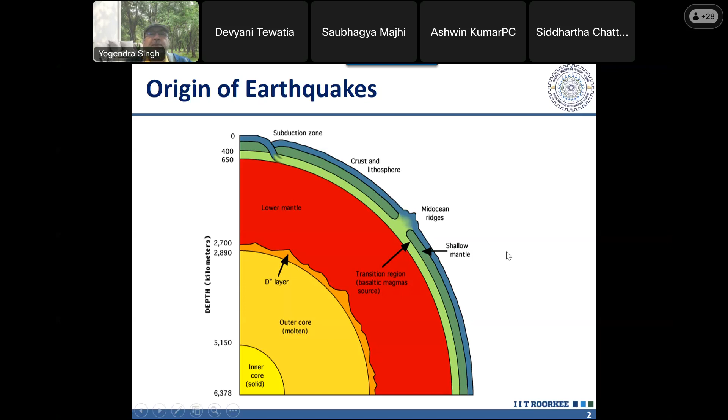Below this solid crust of the earth there is hot molten material. The temperature towards the core of the earth increases, and because of that there are convection currents. Those convection currents apply forces on the earth's crust in different directions, and due to that this earth crust is broken into different parts, and those parts are moving with respect to each other. You may ask what is the proof for that - the proof is in terms of the continental drift theory. Scientists have observed that all the landmass of earth which we see today can fit into one single landmass. The hypothesis is that once upon a time, some 225 million years ago, the whole landmass was together, but because of these convection currents inside the earth's structure, that landmass got broken into different plates, and those plates started moving with respect to each other.

And you can locate India somewhere here in this. Let me change this to pointer.

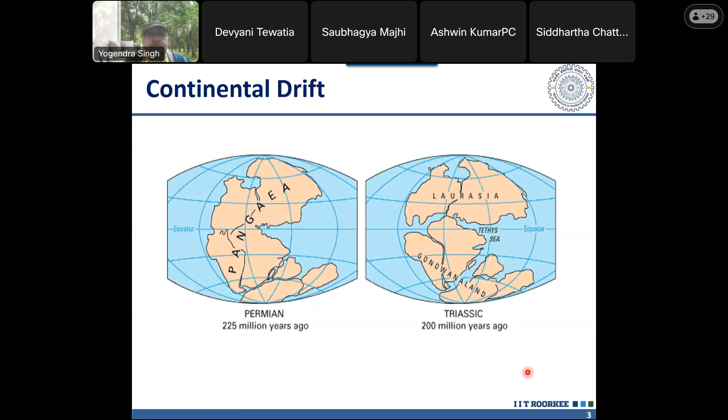So you can see that India is somewhere here, and with time it started moving. Some 135 million years ago we were somewhere here, and then we moved further. This landmass, this plate, later developed into the Indo-Australian plate, which was moving towards the Eurasian plate, and finally this is the situation we currently have.

We can see that the lower part of India, below the Himalayas, has come from another plate, whereas the top part, coming from the Chinese side, has come from the Eurasian plate. So currently India and Australia are on the same plate, and that plate is moving towards the Eurasian plate, the Chinese side, and we are losing around 2 inches per year of land.

So what is happening is this Indo-Australian plate, moving towards the Eurasian plate, is going below the Eurasian plate, and slowly it is getting consumed, it gets molten, and there is a lot of force developing at the interface. As a result of that force, the height of the Himalayas is increasing. You may be aware that the height of Everest is actually increasing by a small amount every year. As a result, we are also losing our land by a small amount of 2 inches per year.

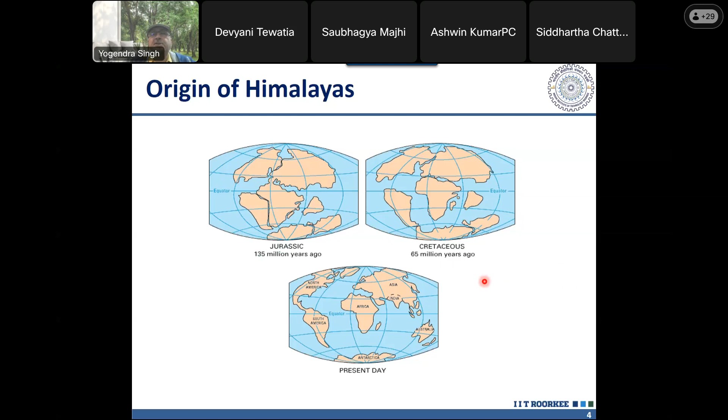That energy, time and again, gets relieved in the form of different earthquakes. So this area is seismically very active, but it's not that earthquakes are occurring only along this boundary.

If we look at the different tectonic plates currently existing on the Earth's surface, these boundaries have been identified as shown here, and different types of motions are occurring at different boundaries. Here you see this triangle notation at the boundaries, showing convergent boundaries. At this location, the plates are moving towards each other.

So what we see here in the Himalayas and the northern side of India, here also we see convergent boundaries. Then at other locations, the plates are moving away from each other, so there are divergent boundaries. These divergent boundaries fortunately are generally occurring below the sea.

So new earth, new crust is getting created. There are mid-oceanic ridges which have been found under the deep oceans, which is proof that, through measurement of the magnetic orientations there, it has been found that those ridges have been created at different instants of time. That shows how the earth crusts, or these plates at these locations, have moved away from each other. Then there's another type of activity shown here.

This plate, the Indo-Australian plate, which was one plate, is actually trying to break into two. What you see here, this red hatched portion, is being subjected to very large stresses. In this region, close to Indonesia and Sumatra, a lot of energy at the moment is getting dissipated, and we have seen that large earthquakes in the recent past have also occurred here.

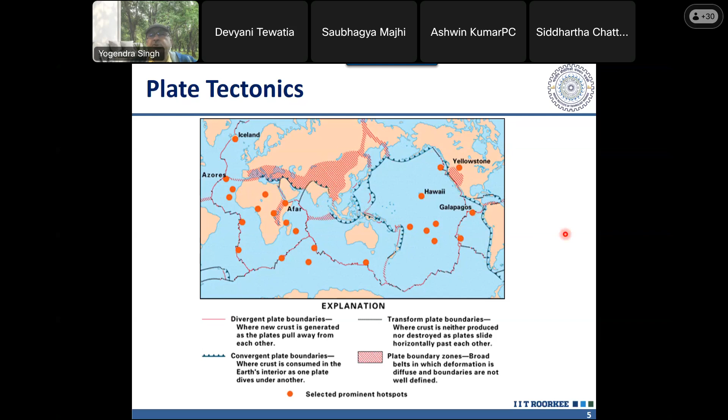These are called interplate earthquakes, occurring at the boundary of different tectonic plates. Earthquakes are not limited to the boundaries; they also occur within them. Within this Indo-Australian plate also, earthquakes are occurring. These are called intraplate earthquakes, but generally the intensity of intraplate earthquakes is less compared to interplate earthquakes.

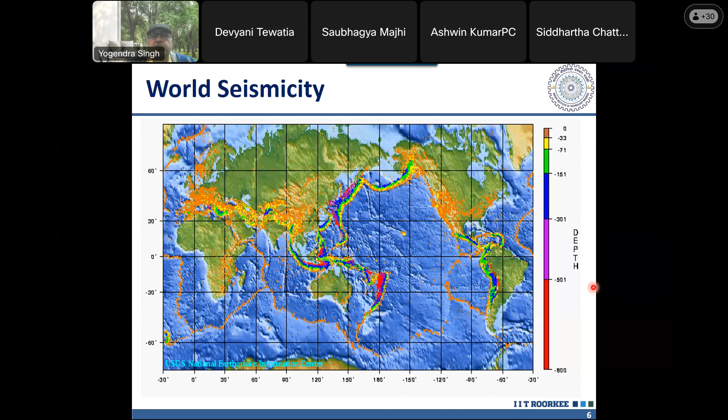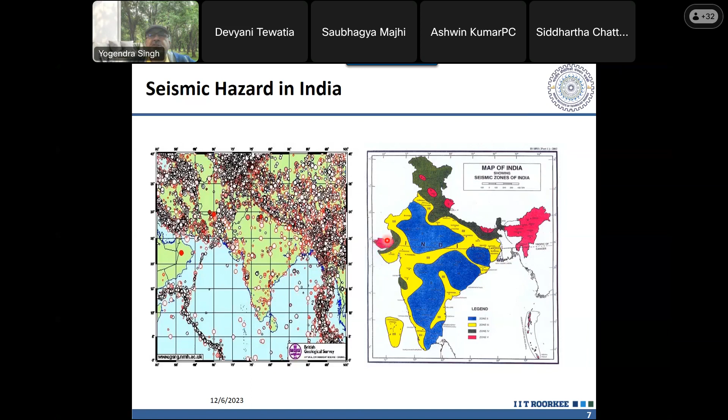If we see the closeup of India, most of the earthquakes are occurring in the northern part, but near the Gujarat Kutch area also a lot of earthquakes are occurring. These regions from the beginning have been in the highest seismic zone, which we currently denote as seismic zone 5. If you look at the current seismic zonation map of India, zone 5 is near Gujarat Kutch area and in the Himalayan region. We have the most seismic zone there.

When we try to quantify the energy released by earthquakes, two terms are often used. One is magnitude, which is the total amount of energy released, and intensity is the amount of energy per unit area received at a particular site. Magnitude we can compare with the wattage of a bulb, and intensity we can compare with the amount of light in candela we are getting at a distance.

A larger magnitude earthquake at a given distance will cause larger intensity. At the same time, the intensity at a larger distance from a given magnitude earthquake will be smaller, because whatever energy is emitted from an earthquake gets attenuated. It gets distributed into a larger volume as the distance increases, which is why it reduces per unit area and also gets attenuated.

The energy gets dissipated as the waves move from the epicenter or hypocenter towards the site. While traveling through rock and soil, that energy gets dissipated. So the intensity with distance goes on reducing, whereas magnitude for a given earthquake remains constant. Whether an earthquake occurs in India or in the US, the magnitude will remain the same, but its intensity will change from place to place depending on the epicenter's location and how far that place is from it.

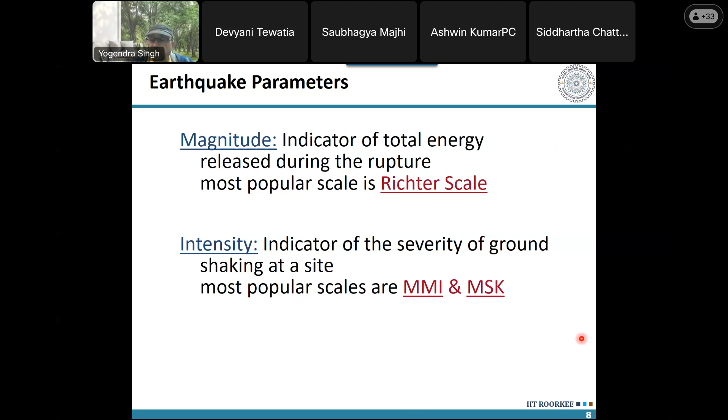On the other hand, we can have instrumented intensity scales where we measure intensity in terms of some measurable quantity using an instrument, such as acceleration and velocity. How much acceleration or velocity occurs at a particular site can be used to define the intensity. So in modern ways, intensity is defined in terms of either PGA or PGV, or in terms of the response spectrum itself, what we call spectral acceleration or spectral velocity.

Earthquakes have been occurring on Earth's surface from the beginning, and since mankind started understanding or observing earthquakes.

They have been observing that earthquake causes a lot of damage. Why is this causing so much damage? This took us some time to understand. What we understood was that earthquake causes a horizontal force, whereas gravity, which is always acting on our structures, acts in the vertical direction. So our structures are inherently weaker in the horizontal direction.

We know that acceleration due to gravity, acting vertically, equals 1g, which is much more than the acceleration usually caused by an earthquake. In some cases, the horizontal acceleration caused by an earthquake can be close to 1g, but in most cases it is much less. Still, even if it is less than 1g, it causes a lot of damage, and the reason is that it is horizontal.

Earthquake does not cause only horizontal force, it also causes vertical force. In fact, earthquake causes acceleration in all 6 directions. It causes not only translation but also rotational motion at any site. Most of our instruments so far are not able to measure angular acceleration, so we mostly talk about translational components: 2 horizontal and 1 vertical. Out of those, the horizontal components are more damaging.

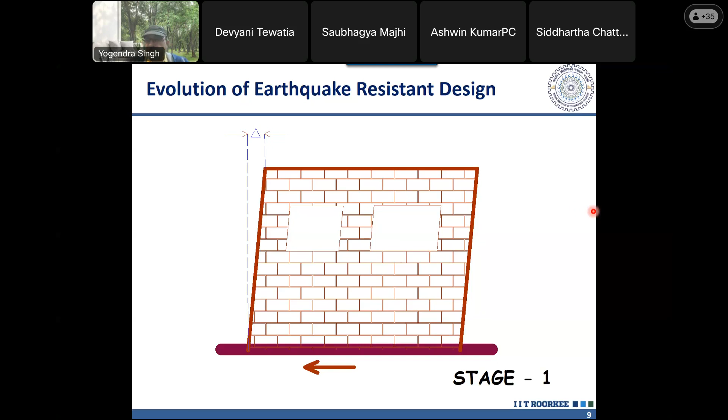As measurements of earthquakes were made, it was seen that acceleration may vary. This is our oldest code, the first edition of IS 1893. Some of you might have already seen it. IS 1893, 1962 - at that time the country was divided into 7 zones, from zone 0 to zone 6.

Later it was found that there is nothing like zone 0, where earthquakes cannot come - the whole country is subject to seismicity or earthquake effects. So zone 0 was done away with. Later, zone 1 was merged into zone 2. Currently we have 4 zones, starting from zone 2 to zone 5. Zone 1 has historically been merged into zone 2, but we still refer to it this way.

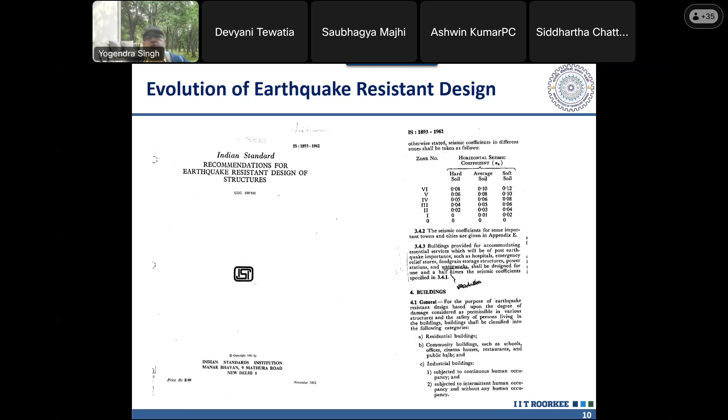When measurements were made for earthquakes, it was found that the actual amplitude of earthquake acceleration is much more than the 10% or 20% used in designing our structures. Yet those structures designed for 10 to 20% have survived earthquakes in the past, even though the actual acceleration during an earthquake may be much larger.

Here we see the record of a very famous earthquake, the El Centro earthquake. The top plot is the record of acceleration obtained from an accelerograph - the instrument that records acceleration, and that record is called an accelerogram. For El Centro, recorded at this particular site, the acceleration is 0.319g.

The second plot is of velocity. This can be obtained directly from a seismograph, which measures velocity, or by integrating the acceleration record from the accelerograph. The last, bottom plot is displacement. Displacement cannot be measured directly - it is obtained by integrating velocity, which can either be directly measured or obtained by double integration of the accelerogram record.

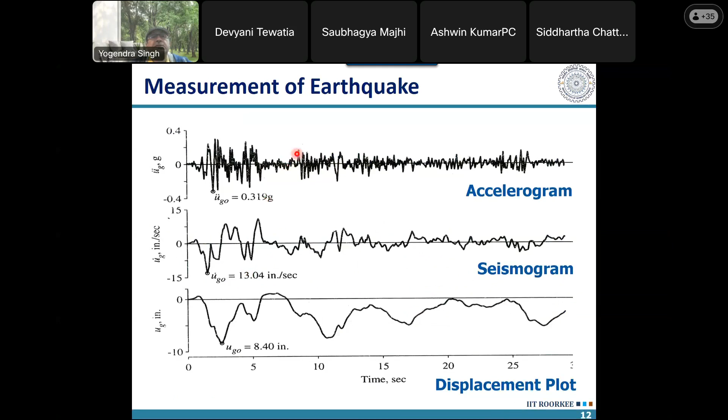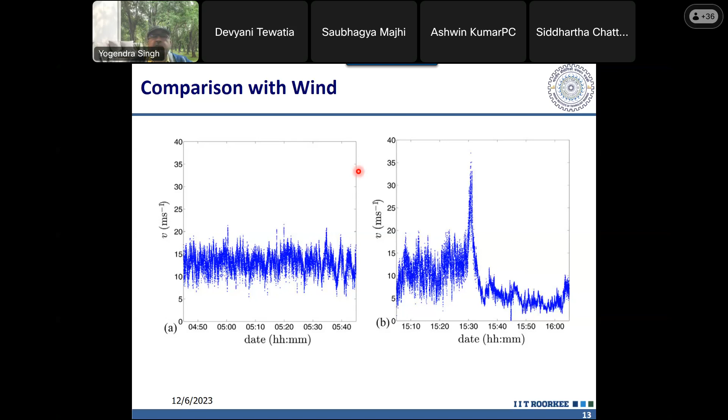Using this characteristic of earthquake, we can design our structures to take advantage of ductility. Whereas in case of wind, we cannot take advantage of ductility because wind is not going to reverse its direction so frequently. It will take hours or days to reverse the direction of the wind, whereas in case of earthquake, within a fraction of a second, it is reversing its direction.

Now the next question which we faced was that earthquake is a reversible force. We can take advantage of that, and taking advantage of that, we can design our structures for only 10 to 20% of its weight in the horizontal direction, and still it can survive the earthquake.

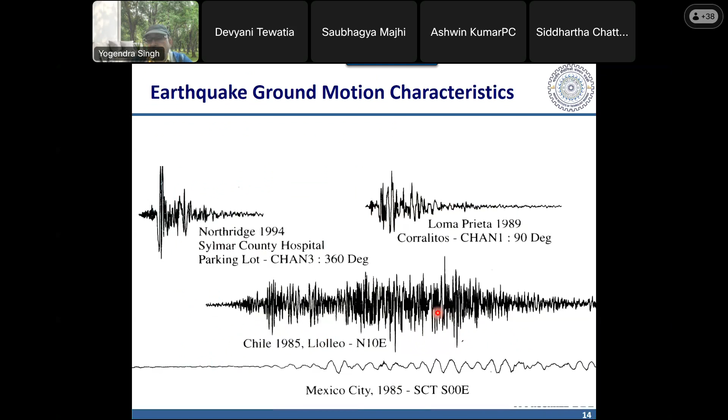The third component, which is still not understood or used in our design codes, is the duration of the earthquake. When a structure, whether steel or RCC, is subjected to earthquake, under each pulse of the ground motion, we can consider each earthquake time history as consisting of several pulses, and each pulse causes some disturbance to the structure. The structure undergoes deformation, generally more than its yield capacity, and due to that there is some damage, which is cumulative.

It gets accumulated with successive cycles. We know that repeated load can cause damage to structures even if it is less than the yield capacity of the structure - this is fatigue. When a train or vehicle moves over a bridge for millions of cycles, although the stresses are much less than the yield stress, those are working stresses, but still they cause some tiny damage, and that damage accumulates, and finally the bridge collapses due to fatigue.

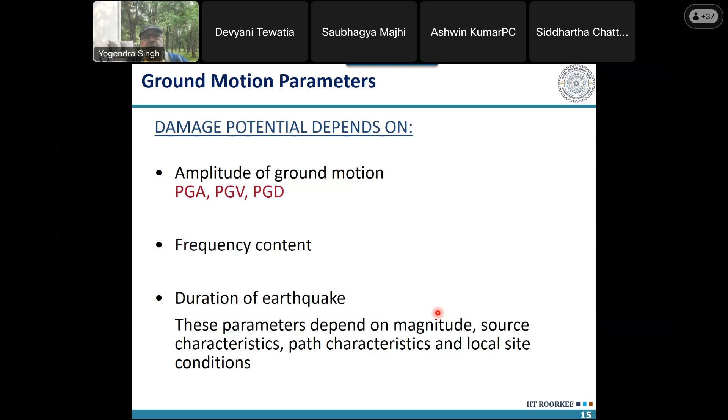Now in case of earthquake, there is repeated loading, but that loading is more than the yield capacity of the structure, and due to that there is permanent displacement, yield displacement, and inelastic displacement, and due to that inelastic displacement there is damage. Under each cycle of loading there is damage to the structure, and that accumulates, and due to that accumulation of damage, the structure collapses. So we have to keep in mind the duration also.

Currently our codes do not take into account the duration. They take into account the amplitude and the frequency content, and the amplitude and frequency content together can be represented by response spectrum. So a response spectrum can be understood like this: we have a series of single degree of freedom systems.

Single degree of freedom systems are simple structures. We can visualize them like single story structures, having one direction of movement. When such simple structures are subjected to the same earthquake motion, their response is different. If we note down the peak response of each of these single degree of freedom systems and plot them with respect to frequency or period, that plot is called response spectrum.

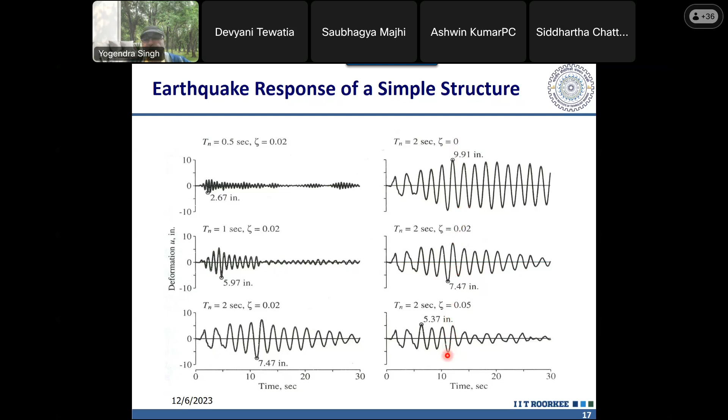If we consider a constant damping for all single degree of freedom systems, and consider their increasing period - here the mass and height of the single degree of freedom system goes on increasing, meaning the period goes on increasing - when we plot their peak responses with respect to period, with a given amount of damping considered constant in all these systems, then this plot we call response spectrum.

We do not get a smooth pattern. So what is done in the codes is that they consider the normalized shape for a number of earthquakes. And a quantity which is used as response quantity to plot the response spectrum is generally pseudo acceleration. So this pseudo acceleration is different than the real acceleration of the single degree freedom system, although its value is close if the damping is small. But theoretically, both are different.

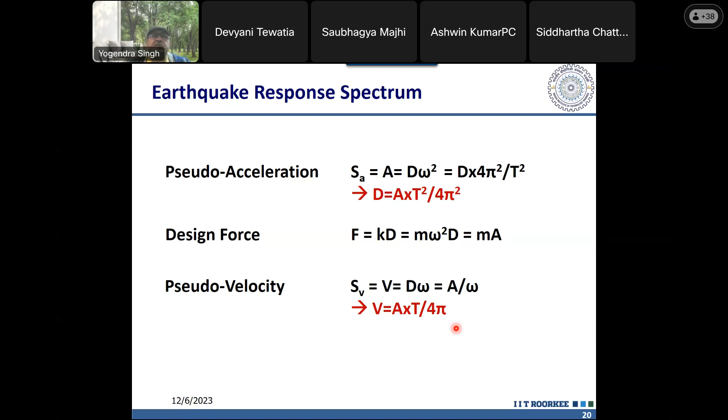So that's why pseudo acceleration is more common than the real acceleration. And whatever response spectra we find in codes, those are invariably representing pseudo acceleration, not the real acceleration. But as I told, if the damping is small, 0 to 5%, then the difference between the real acceleration and the pseudo acceleration is not much, and pseudo acceleration itself can be treated as the real acceleration.

So as I said, for individual earthquakes, the shape of the response spectrum, whether it is displacement spectrum or pseudo acceleration spectrum, it is very zigzag. So what the codes do is consider the spectral shapes, normalized spectral shapes of different earthquakes. And for normalization of that shape, this value here corresponds to zero period.

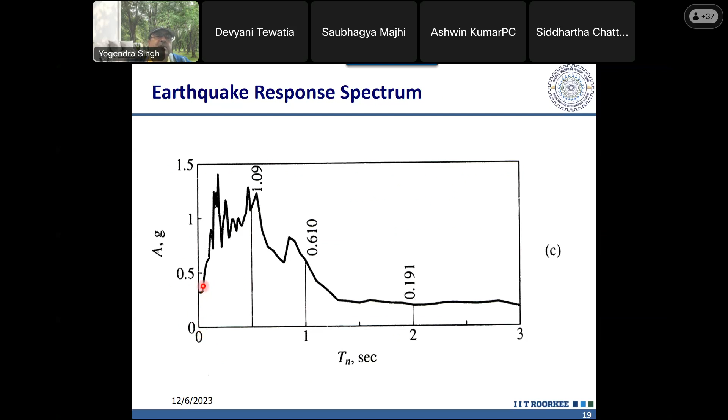So practically zero period is not possible. Zero period means an infinitely rigid structure, so such a structure is not there. But any structure which is having frequency greater than 33 hertz, or the period is 1 upon 33 seconds, 0.03 seconds, that we consider as infinitely rigid. And the acceleration of that structure, which is having such high stiffness or such short period, that we call zero period.

And the corresponding value of this pseudo acceleration we call effective peak ground acceleration or zero period acceleration. So this value of zero period acceleration or effective peak ground acceleration is very important. So we can think that this structure will have this type of period, very short period, or the frequency greater than 33 hertz.

It will be like a rigid concrete block embedded into soil. So when it is going to move, it will move along with the ground, so its acceleration will be close to that of the ground. Only thing is that it will do some sort of averaging on that acceleration. So this effective peak ground acceleration is like an averaged peak ground acceleration over several points. So this is close to peak ground acceleration, but it is not exactly equal to peak ground acceleration.

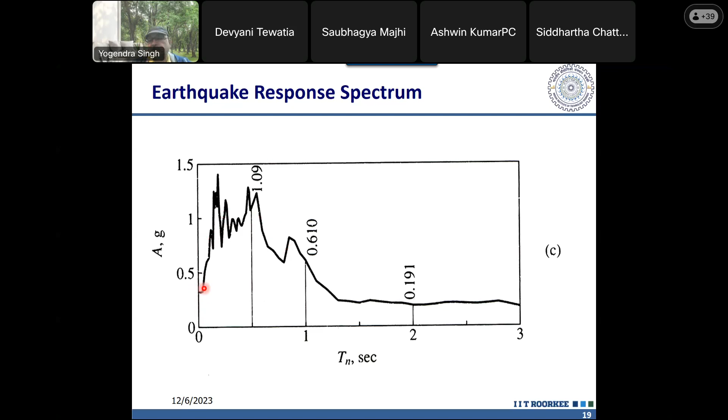And that's why we call it effective peak ground acceleration. This is the most commonly used parameter to define the intensity of earthquakes. What is given in our code as zone factor Z is also this zero period acceleration or effective peak ground acceleration. So what the codes do is normalize this shape with respect to this effective peak ground acceleration.

So this value becomes 1, and then the spectral shape is obtained. This spectral shape has 4 distinct ranges. The first range, from 0 to T naught, shows the spectral acceleration increasing. That small flat portion we are ignoring. So we are starting from zero period up to T naught, which is close to 0.1 second. In our code, it is 0.1 second. So the acceleration is increasing, then the acceleration is constant. This range we call acceleration control or acceleration sensitive range, where acceleration is constant.

Then we have this range, which we call velocity control range. Actually, the pseudo velocity here is constant. If I plot the pseudo velocity spectrum by multiplying this by t over 2 pi, we can understand this will become constant, because it is proportional to 1 upon t, and when I multiply by t over 2 pi, t will cancel out, so this portion becomes constant.

Beyond this, TL is called the long period corner period of the response spectrum. This is the junction point of the velocity control range and the displacement control range. In the displacement control range or displacement sensitive range, the spectral acceleration or pseudo acceleration is proportional to 1 upon t square, so it is some constant divided by t square. When I convert this into displacement, I multiply by t square over 4 pi square, so t square cancels out and it becomes constant.

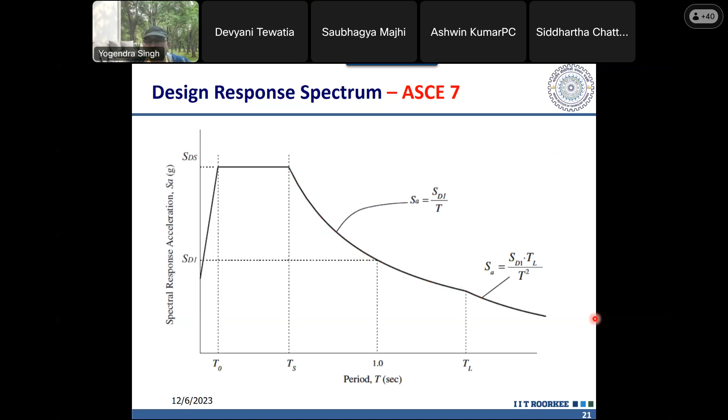So there is a difference in the shape of the response spectrum for acceleration and displacement. For periods greater than TS, which varies from 0.4 second to 0.7 second, the acceleration reduces with period. The forces acting on our structure are reducing, because forces are mass into acceleration. So those are reducing, but the displacement is not reducing. Displacement continuously increases. This difference in the shape of the acceleration and displacement response spectrum we have to keep in mind.

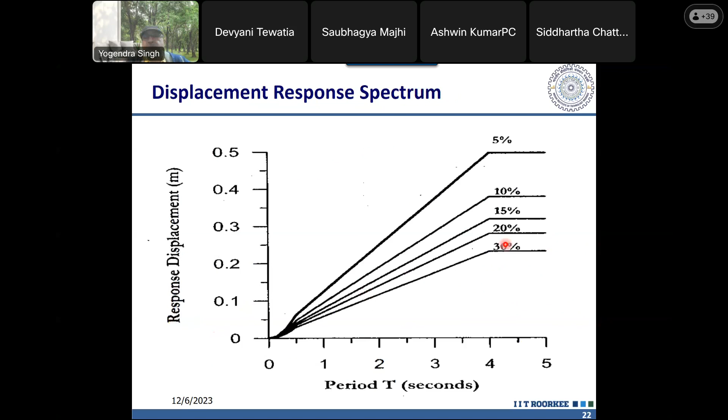Now this is the shape of the response spectrum given in our code. It is proportional to 1 upon t up to 4 seconds, and beyond that it is assumed to be constant. But beyond 4 seconds, assuming it to be constant is not correct. Actually it should be proportional to 1 upon t square. When we assume it to be constant, it may not cause a big problem when designing the structure for forces, because the forces in any case are much smaller, since the acceleration is small.

But when we are calculating displacements, the displacement will come out to be much higher. When we assume it proportional to 1 upon t square, the displacement was constant. When we assume it proportional to 1 upon t, this was increasing linearly. But when we assume it constant, this will be increasing parabolically. So the displacement will increase very drastically if we follow this shape of the response spectrum. The shape of the response spectrum has been changed in the revised code, which is under wide circulation. I will talk about that slightly later.

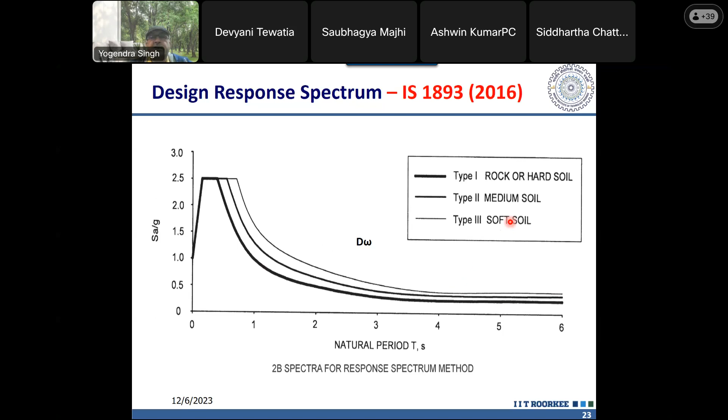Now we take advantage of this shape of the response spectrum. We can see that this acceleration response spectrum, or the spectral acceleration, is reducing drastically with period, proportional to 1 upon t. And we take advantage of this in base isolation by using period shift.

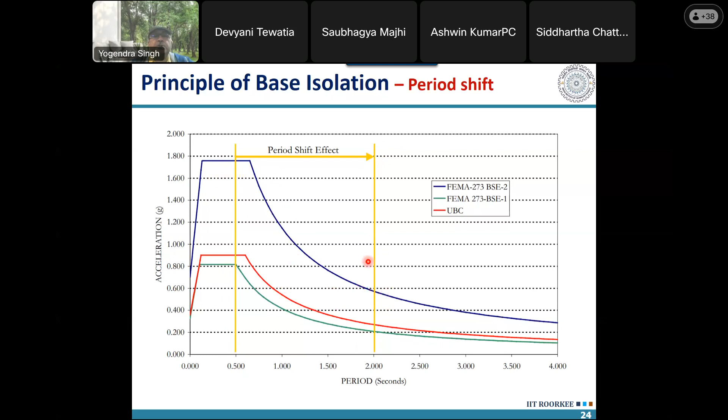So we take advantage of the shape of the response spectrum in base isolation, and we take advantage of damping in our structures when we are using supplemental energy dissipation devices, because the response depends not only on period but also on damping. As we increase the damping, even if the period is kept constant, the response will go on decreasing.

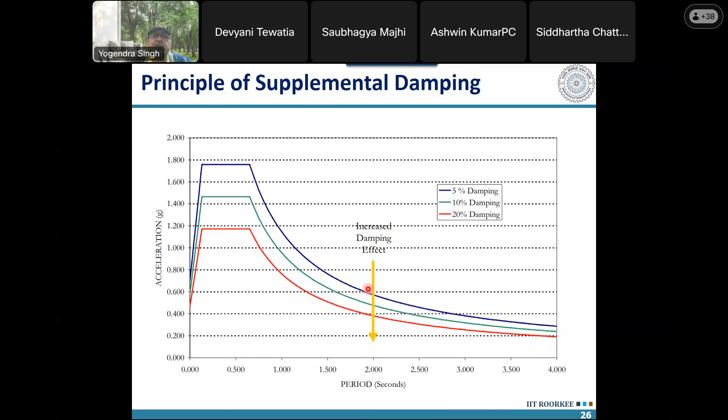Different types of damping devices are there, which are either based on friction or yielding or viscoelastic deformations or viscosity of the fluid. So different types of dampers are there. Today I will not talk about that because that is a different topic, but we can take advantage of that.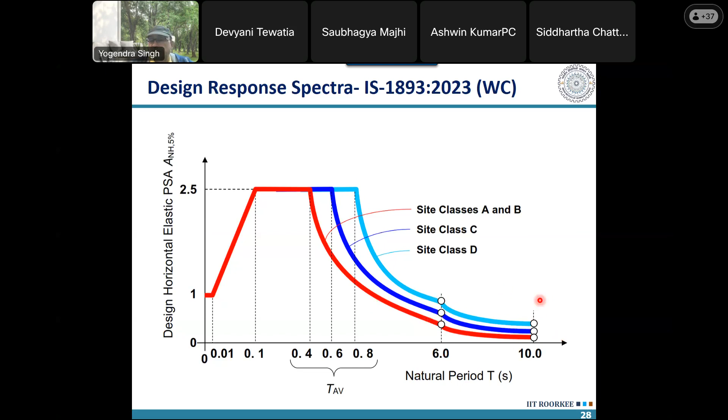Now the other issue regarding quantification of the intensity of the earthquake is related with its return period. Because earthquake is a rare phenomena, smaller earthquakes are occurring or repeating themselves more frequently, but larger earthquakes, fortunately, are repeating after a longer time. This phenomena is random. It varies from place to place, fault to fault, and site to site.

So while doing or assessing a hazard corresponding to design for our structure, two approaches are available. One is what we call deterministic seismic hazard assessment, and another is probabilistic seismic hazard assessment.

In deterministic seismic hazard assessment, we consider what maximum earthquake is possible at a site. So we consider all the faults in the vicinity of that site. When I say vicinity, it is considered as about 300 kilometers radius. Within that radius, we consider all the faults which have a potential to generate earthquake. Then we identify what magnitude that earthquake can be caused at that fault, and based on the magnitude, what type of earthquake it will occur, whether it is normal fault, reverse fault, strike slip fault, or oblique fault.

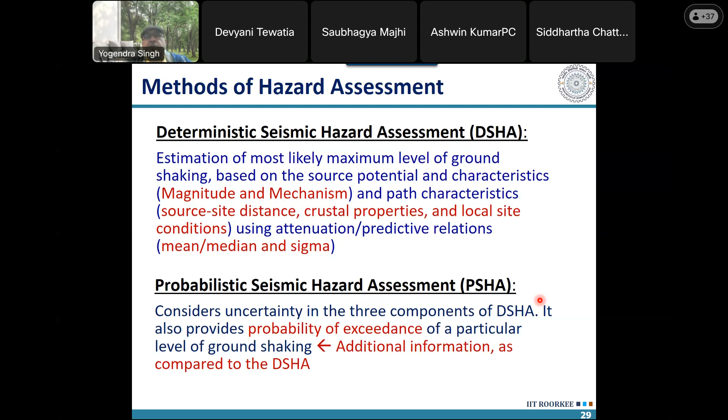This 2% in 50 years, 50 years here representing the average design life of a structure, a common building. So that corresponds to a return period of 2,475 years, roughly 2,500 years. This is the most commonly used notation.

In the codes, we call it maximum considered earthquake, MCE. Then another one, very commonly used, is this 10% probability of occurrence in 50 years, which corresponds to a return period of 475 years. We call it design basis earthquake.

Interestingly, this is the earthquake which we have been using in design. So it is interesting to note that when we are designing our structures, our intention is that our structure should be able to survive MCE, the maximum considered earthquake. But we are not designing for MCE, we're designing for DBE. And the relationship between DBE and MCE is not constant, it varies from place to place.

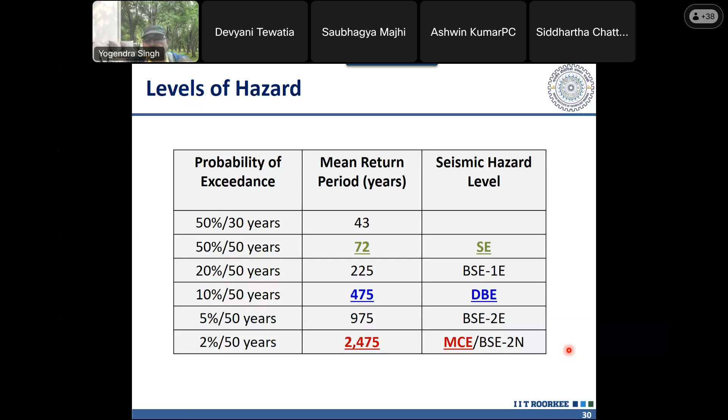Now it is important to understand what the zone factor Z given in our code is representing. As I said, Z, the zone factor, is representing zero period acceleration, which is nothing but effective peak ground acceleration, EPGA. It is the median value of EPGA obtained from DSHA, deterministic seismic hazard assessment. So currently the zonation and zone factor given in our code are based on DSHA.

And these are the median values. Deterministic seismic hazard assessment actually does not give any return period, so there is no concept of DBE and MCE there. But after probabilistic seismic hazard assessment, PSHA, came in, these terms MCE and DBE came into being.

So there is an attempt to compare this. How can we compare this Z value given in our code with MCE or DBE, which are the concepts of PSHA? If we look at ASCE 7, the current code provides a comparison between DSHA and PSHA, and it says that when performing DSHA, we can consider median plus 1 sigma, that is 84 percentile, as MCE.

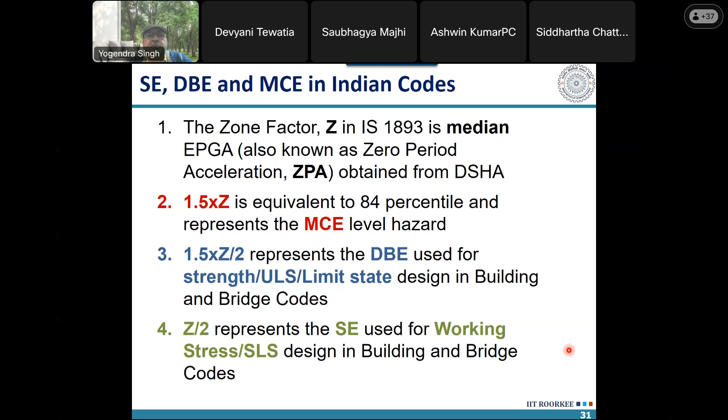So Z by 2 we consider while calculating Ah as Z by 2, I/R into Sa/g. And 1.5 we use later when converting from median to 84 percentile. Z by 2 without multiplication by 1.5 represents serviceability level earthquake, having roughly 50% probability of occurrence in 50 years, used for working stress design. So in working stress design or serviceability limit state checks, we use this Z/2.

So if we have to develop the design response spectra in our code corresponding to DBE and MCE, we have to understand that what is given in our code as SA/g is actually not the response spectrum. It is a normalized spectral shape. So a better way of representing that will be SA/Z, so actually it is SA/Z.

And when we multiply it by 1.5Z, then it becomes MCE. And when we multiply it by 0.75Z, that is 1.5Z by 2, then it becomes DBE. And when we multiply it by 0.5Z, then it becomes serviceability level earthquake. So these three multiplication factors we are using in our code to convert this into serviceability, design basis, and maximum considered earthquake.

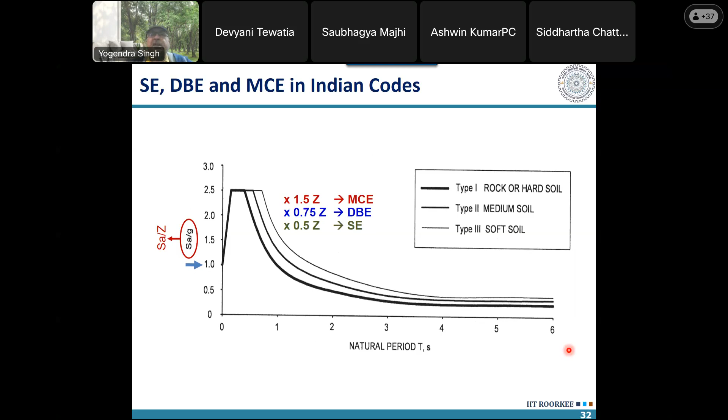Our code does not say anything about what we are expecting from our building or structure when we are designing using this DBE. It doesn't say anything, but it is understood that if we are designing as per this, then our structure will be able to survive the maximum considered earthquake without collapse. It doesn't mean that it will not damage - it will get damaged, but hopefully it will not collapse. But that is also not guaranteed in the code. Code does not have any mechanism to guarantee that.

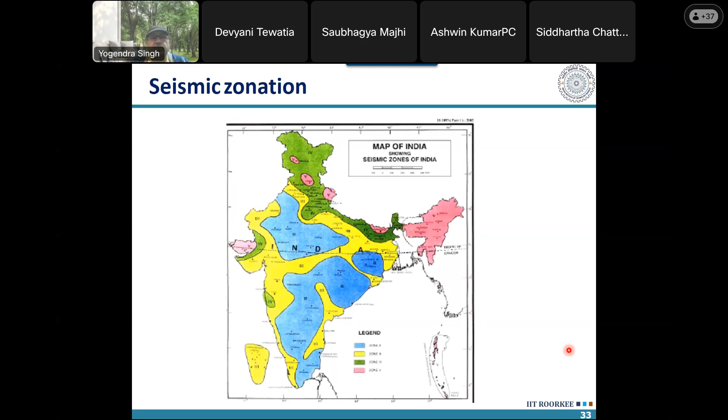So this is the current seismic zonation map, which consists of 4 zones, zone 2 to zone 5. And the most severe zone, zone 5, is there in the Himalayas and in the Kutch region. These are the corresponding zone factors Z. So these zone factors Z are nothing but the value of effective peak ground acceleration, EPGA or ZPA, corresponding to the median values which are obtained from DSHA, deterministic seismic hazard assessment.

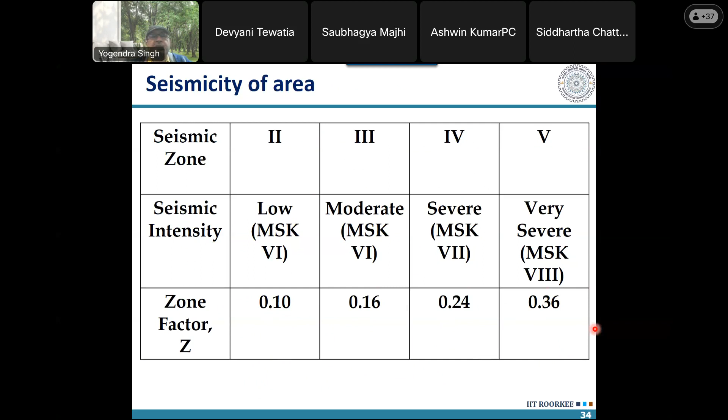And we have to convert this into DBE and MCE, we have to multiply by the corresponding factors. On the other hand, this new code which is under revision and in wide circulation, it is expected to come in a few months. So here now, this concept has been changed. It is based on probabilistic seismic hazard assessment.

And for different structures, the design return period is defined. So for which return period we will design, that return period has been specified. So there are normal structures, important structures, and critical structures. Normal structures will be designed for 475 years return period as usual - like today when we are designing, although it is based on DSHA, it is equivalent to 475 years return period, the DBE which we are using in our design. Then critical structures, hospitals and other critical buildings, those will be designed for 2500 years MCE. And in between, those important structures will be designed for 975 years.

So it is not that alarming as it may appear, because at the moment also we are using importance factors. So in case of our hospital buildings or important buildings, we are using an importance factor of 1.5. So that is somewhere in between the DBE and MCE. So it is not exactly MCE, but it is somewhat close to MCE.

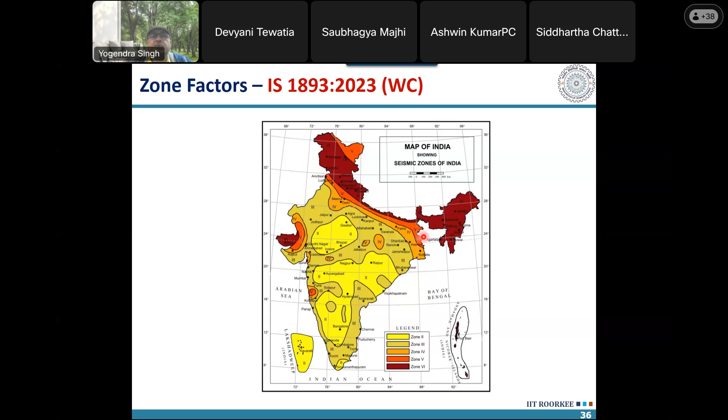So earlier you could see that zone 5 was in the form of patches. Here it is not in the form of patches, but there is a continuous zone here, and a zone 5 here between zone 4 and this Indo-Gangetic plain, foothills of Himalayas. So here the zone 5 has been carved out. Other zones are similar, not same, but similar to the previous zones.

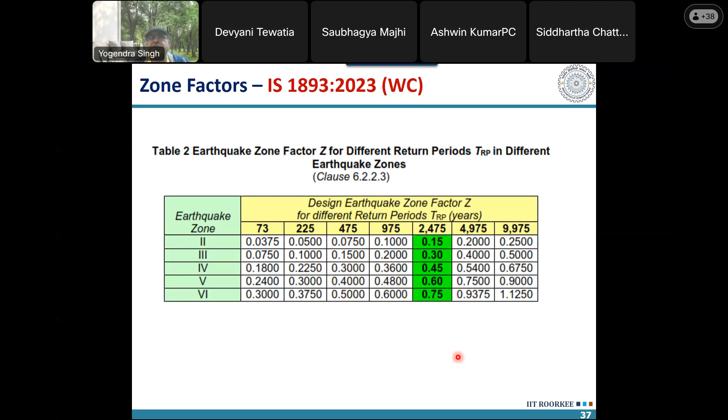And this zone factor Z now, it is given for different return periods - corresponding to MCE, 2500 years return period, and it is also given corresponding to other periods, including DBE. So here you can see that the ratio between DBE and MCE, in case of seismic zone 6, the most seismic zone, it is 1.5, whereas in the lower seismic zones it is 2. So actually it is varying between 1.5 and 2, as I said earlier, that the relationship between DBE and MCE is not constant - it varies from place to place between 1.5 and 2. So for higher seismic zones it is 1.5, and for lower seismic zones the ratio between DBE and MCE is 2.

So that's about earthquake. Now I will talk about structures.

So how do our structures resist earthquake? As I said, we never design our structures for the actual earthquake force which they will be subjected to during an earthquake. We design them for much lower earthquake forces. And how do they survive? Even when designed for much lower earthquake force, they survive by virtue of their ductility capacity.

We can define ductility capacity like this: if I subject a structure to load and plot load versus displacement, when loading it in one direction, initially this loading curve is linear. We call it linear elastic. If I apply some load on my structure and unload it, I will come back to the original position. This property is called elastic, and the behavior is linear.

But then yielding occurs, especially in steel structures, where we can have a distinct yield point. At yielding, there is permanent displacement—without any increase in force, there is displacement. This displacement we call inelastic or plastic displacement, which is permanent. Even if I fully unload my structure, it will not come back to the original position, but there will be some residual permanent displacement or strain.

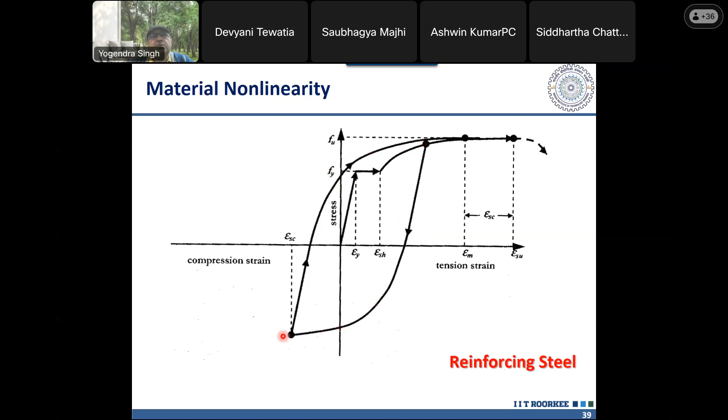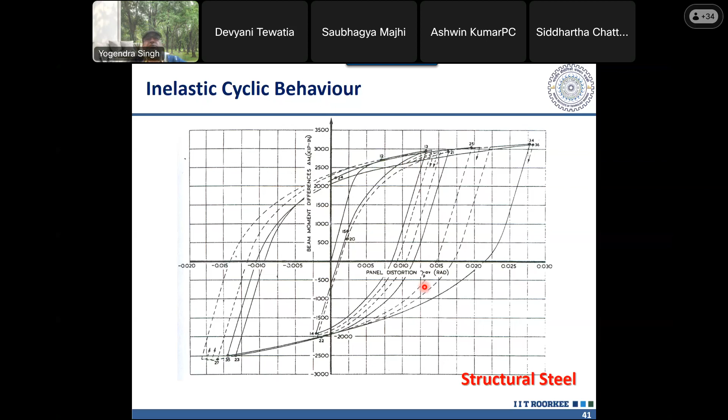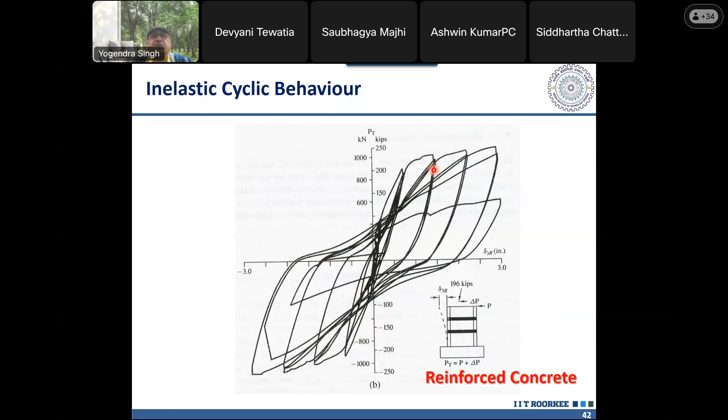Steel, we know, is a ductile material. On the other hand, concrete and masonry are brittle materials. In RCC, we depend on the ductility of reinforcing steel, but since we are also depending on concrete, which is also resisting the forces, there is degradation in stiffness, strength, and energy dissipation capacity of structures made of RCC and masonry. So steel still has its advantage.

Now what is interesting is that it has been observed during past earthquakes that the maximum displacement of the elastic and inelastic structure is the same. If we analyze our structure for a large number of earthquakes, we see that on average, the maximum displacement of different structures designed for different strength levels is the same. This is the equal displacement principle. Although it has no theoretical proof, it is based on observation.

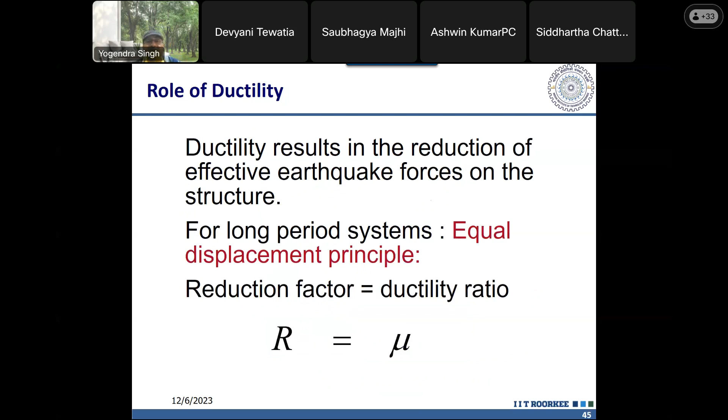Using this relationship, we are currently designing our structures, taking advantage of inelastic energy dissipation. This can be represented by the simple equation R equals mu. Now, what I explained just now was valid for long period structures. In case of short period structures, it slightly changes.

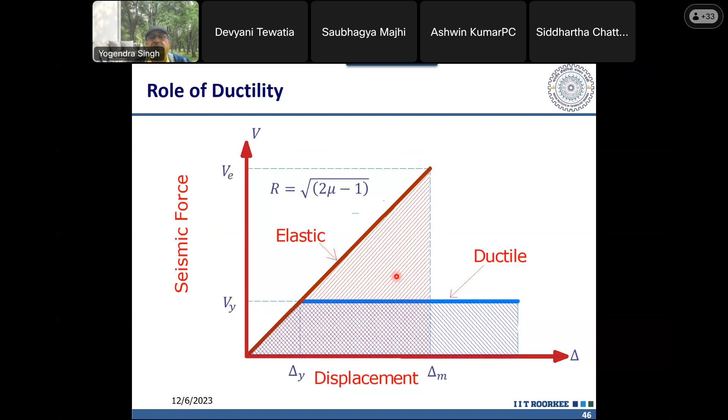For short period structures, it has been observed that the maximum displacement is not the same, but the energy equivalent area under the two curves, the elastic curve and the inelastic curve, the maximum energy stored by the two systems is the same. Using a bit of geometry, we get R equals the square root of 2 mu minus 1. This is valid for short period structures.

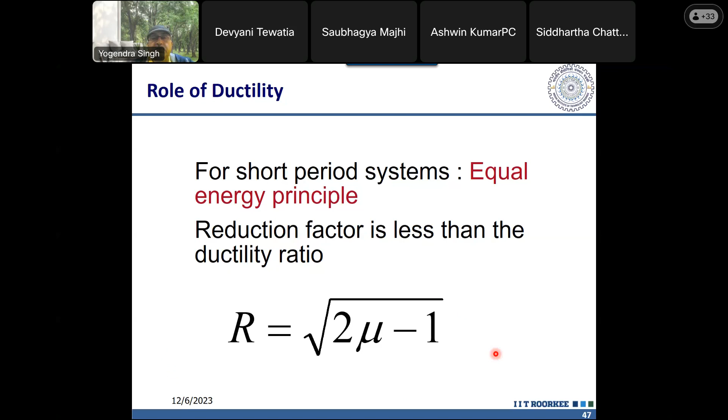Whereas for long period structures, it was the equal displacement principle, and for short period structures it is the equal energy principle. Using both the equal displacement and equal energy principles, we can analyze or design our structures in a simplified manner like this.

Here we try to estimate the hazard as realistically as possible. This blue curve at the top shows the hazard. The blue curve is realistic, obtained for the site either using DSHA or PSHA. Then we reduce it by the response reduction factor R, and then we design for this, the design base shear.

When we are designing, we are using the limit state method, with partial material factors of safety and characteristic strength. Due to these partial factors of safety and characteristic strength, the actual strength of our structure is slightly higher than what we are using—not slightly, it is roughly 2 times that. But still, it is much less than the actual response spectrum, the actual demand.

So we are reducing the actual demand. If we plot this demand response spectrum for MCE, we are reducing it by roughly 10 times. This reduced value is 10% of the elastic base shear we would get on our structure. When we design it using the limit state method, it becomes 2 times that, so roughly 20%. But still, it is only 20% of the demand which will be there on the elastic structure.

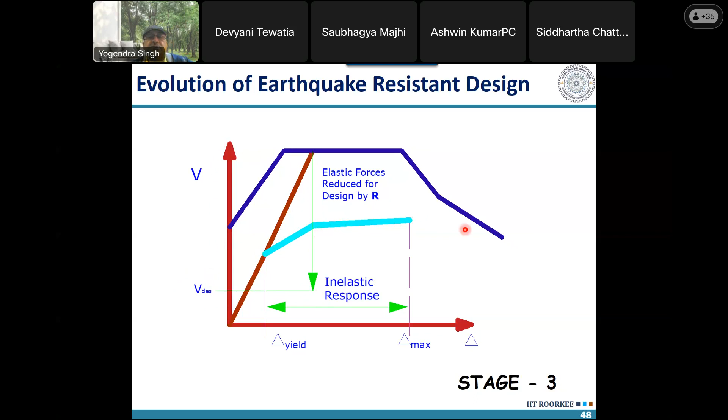We are able to take advantage of this because of energy dissipation. Through response reduction factors, we can take advantage of this inelastic energy dissipation without going through nonlinear analysis. These factors are defined in the code.

Interesting here to see are the steel frames with concentric braces and steel frames with eccentric braces. The response reduction factor given for concentric braces is 4, whereas for eccentric braces it is 5. So eccentric braces are considered better from an earthquake resistant point of view compared to concentric braces. I will explain that in the successive slides.

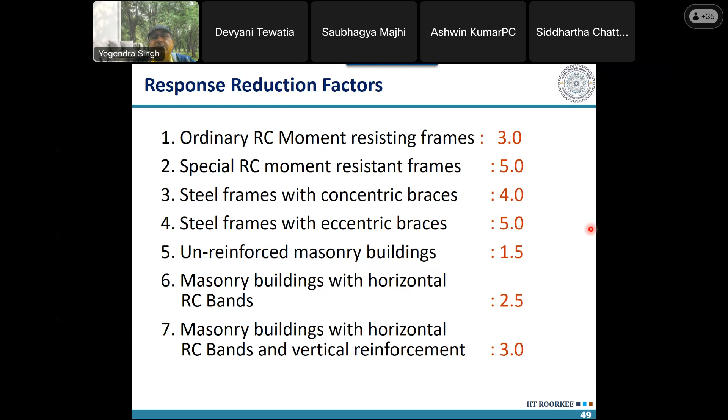When we design any structure, we design it for vertical load as well as lateral load. For lateral load resistance, we provide a structural system that resists the lateral force. The simplest structural system we can provide is a pin jointed frame.

In a pin jointed frame, when the beam has simple connections with the column, it cannot transfer moment. So the columns act as cantilevers, and whatever lateral force is applied is resisted by these columns as cantilevers. The moment we get at the base gets divided into two: P by 2 multiplied by height h.

So PH by 2 will be the moment in each of the two columns for which we have to design our structures. Now I can improve the efficiency of this system by making it rigid jointed. Let's first consider a hypothetical case where the beam is infinitely rigid and the beam-column joint is a moment connection. In that case, our column is going to deform in double curvature and will remain vertical at top and bottom.

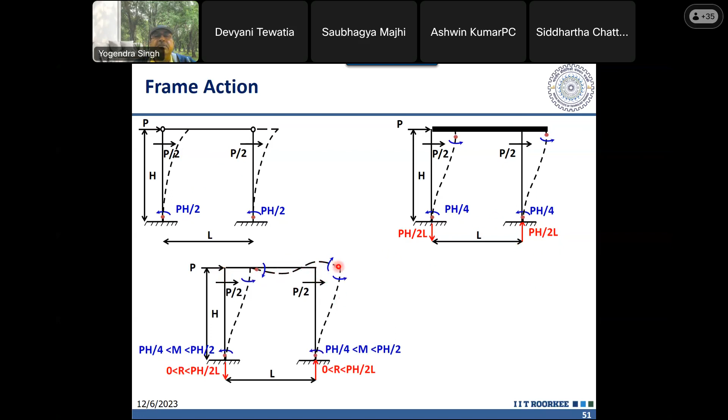Now, in a real frame, the beam will not be infinitely rigid, though the connection can still be a moment connection. In that case, the beam is going to deform, but the column still bends in double curvature, and the moment that develops will be somewhere between PH/2 and PH/4. This increases efficiency because part of the load is transferred through axial action in the columns.

As a result, this becomes a more efficient system. We can make it even more efficient by providing a brace. When we provide a diagonal brace member, the bending moment is almost eliminated—there is no bending moment. The force is transferred through axial action, making this a more efficient system.

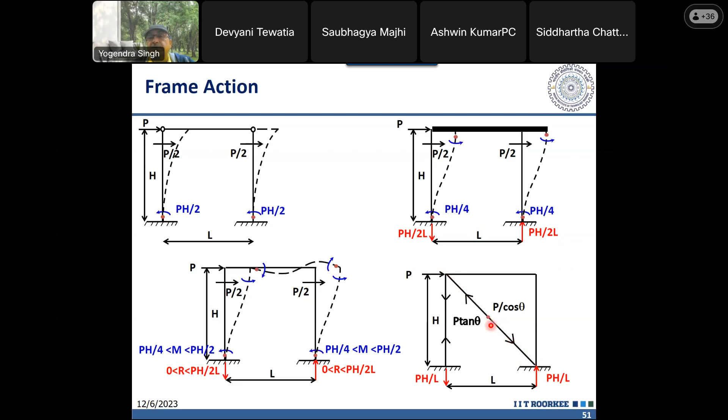But the problem is that the brace, when subjected to compression, will buckle. In the linear elastic range, we can control this buckling by controlling the slenderness ratio, making our brace stocky. So by controlling the slenderness ratio, we can avoid buckling, but we cannot avoid buckling in the inelastic range. When the brace yields, its effective modulus of elasticity becomes zero, and when that happens, irrespective of the slenderness ratio, it is going to buckle.

If I plot the load displacement curve for a moment frame, it looks like this: initially it is linear elastic, and then hinges develop at the ends of the beam and in the columns, giving this type of behavior.

We can see that this is showing good ductility, but when I have a brace frame, the brace is going to be subjected to compressive force. And after yielding, this is going to buckle.

What we see here is that in tension, when the brace is subjected to tension, we get good ductility. But when the brace is subjected to compression, due to buckling, its strength is lost suddenly, so we do not get that good amount of ductility. That's why in case of braced frames, the response reduction factor is reduced, because it gives us better strength and stiffness but not good ductility.

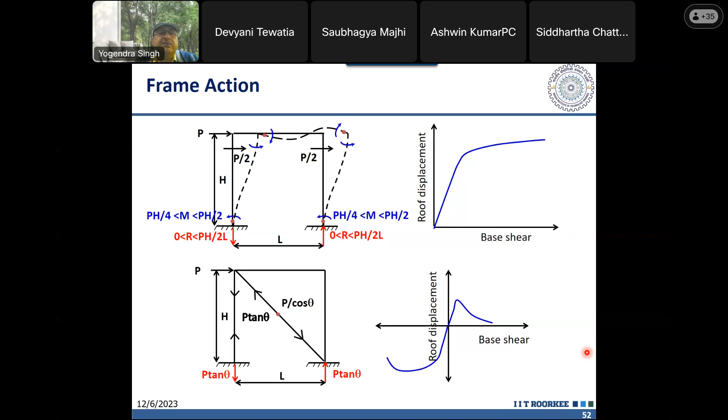In case of earthquake, we depend not only on strength and stiffness, we also depend on ductility. That's why braced frame is not considered an ideal system for earthquakes. This can be improved by providing eccentric braces, arranged in such a way that the yielding of the beam beyond the brace occurs in flexure or shear.

Interestingly, steel is a material which is very ductile in shear, in fact more ductile in shear than in flexure. RCC, on the other hand, is brittle in shear, so in RCC we have to avoid the shear failure mode. But in steel structures, we desire the failure to occur in shear because shear is a more ductile mode.

Using this concept of increasing efficiency by transferring more and more load through axial action, this is the hierarchy of steel structural systems to resist lateral loads. The lowest in this hierarchy is the semi-rigid frame, where the columns bend more or less like cantilevers. Those can be used for the lowest heights.

Then we have rigid jointed frames where the efficiency increases. Then we have eccentrically braced frames - we do not prefer concentrically braced frames, we use eccentrically braced frames. Then we combine eccentrically braced frames with outriggers, so the efficiency of our system increases further.

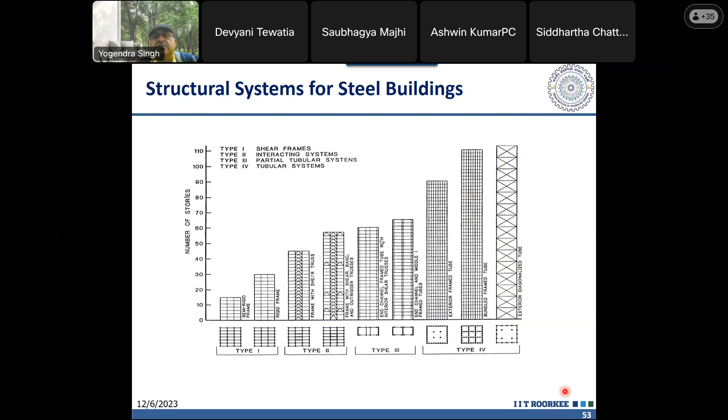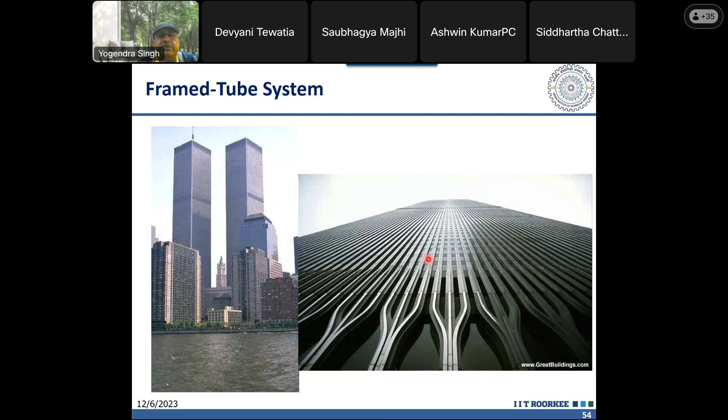Or you can also think of it as a steel hollow tube which had punctures for windows - either way we can visualize it. This is another example, the Sears Tower.

So here we have a multi-cell tube. Nine cells are there, and different cells are stopped, terminated at different heights. So that gives a peculiar architectural shape to this building.

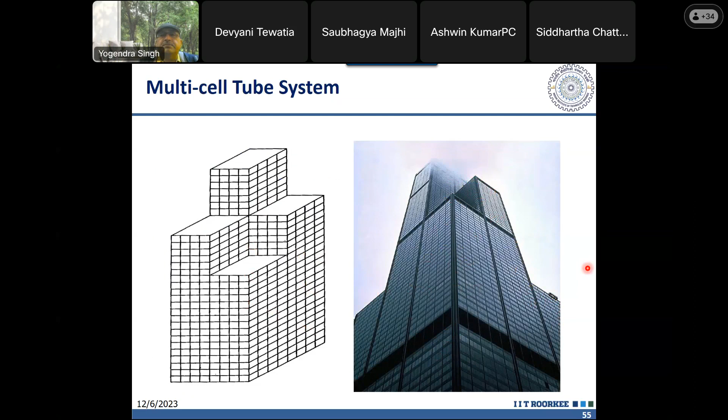But during earthquake, what happens? The members near the joints are subjected to yielding. And when these are yielding, they are subjected to inelastic buckling. Due to inelastic buckling, the effective modulus of elasticity reduces to almost zero. Due to that, the buckling occurs close to the joint. As a result, we are not able to take advantage of the full plastic capacity of these members.

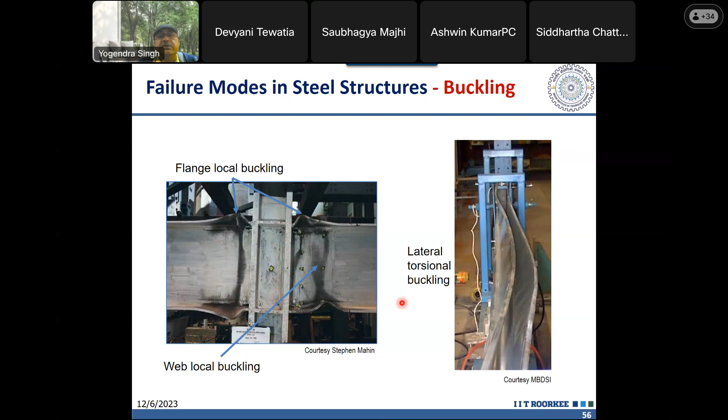This can be controlled by considering adequate thickness of the web and flange. Our code defines steel sections into different categories, starting from plastic sections to non-compact sections. The plastic sections are those where this buckling will occur, because in any case we cannot avoid it, but it will be limited, occurring after the plastic moment capacity has been achieved. When we achieve the plastic moment capacity and then this buckling occurs, that is the best behavior we can achieve from our steel sections.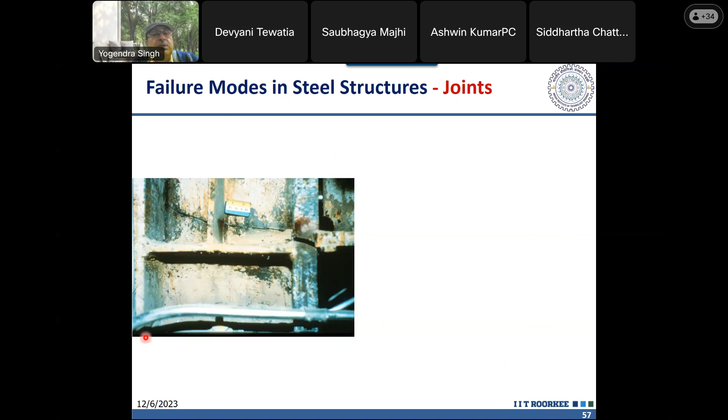The other major cause of failure or damage during past earthquakes has been the failure of the joints. The beams and columns are meeting, and at those locations there is high concentration of stresses. At the beam column joint, the bending moment changes its sign, and when it does, very high shear stresses develop. So the joints are subjected to very high shear stresses, and most failures have been observed at the joint.

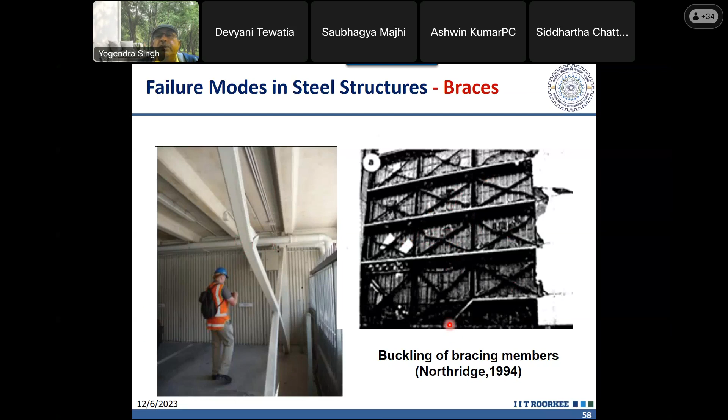So here we have buckling of the concentric brace. The concentric brace can be subjected to buckling, and when subjected to several reversible cycles of earthquake, in each cycle it will buckle, then straighten, then buckle again. So we can have rupture type of failure - buckling and rupture. This photograph is not that good, but very instructive to show what type of damage can be expected in case of concentric braces. This is another set of photographs showing the buckling of concentric braces during earthquake.

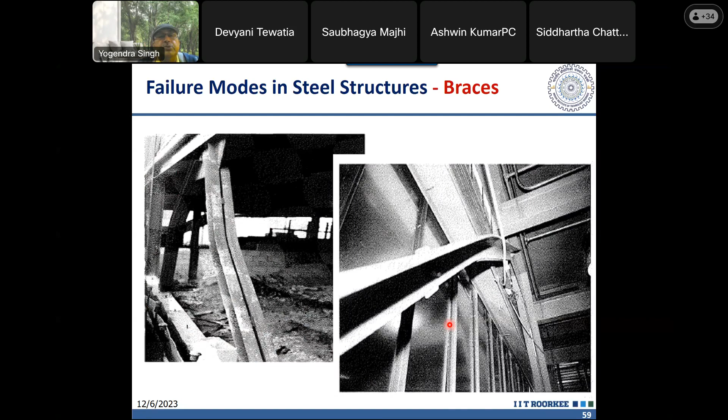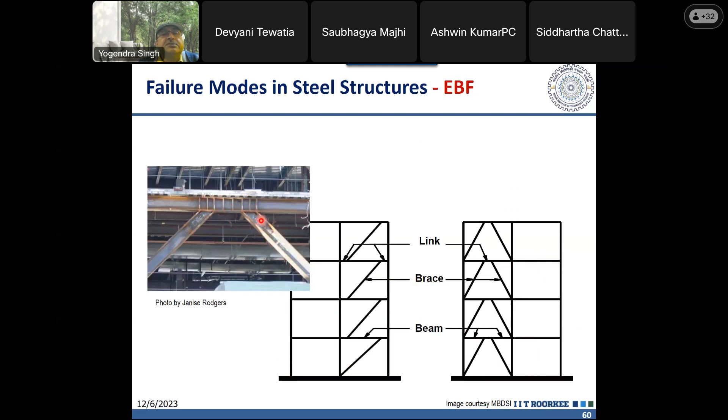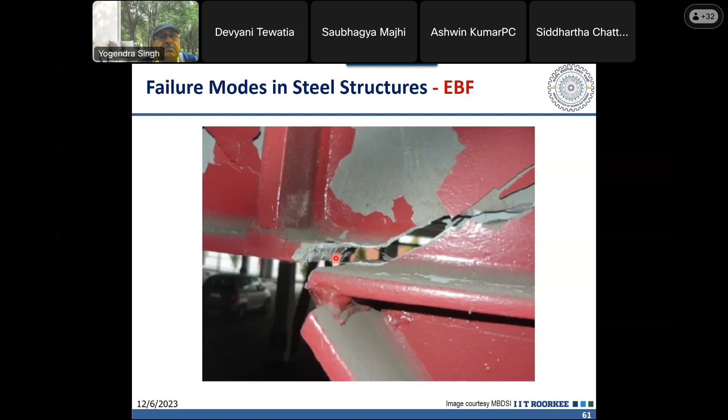If there is a little eccentricity, then very high shear stresses will develop, and that can cause shear failure of our link. So that's all about steel structures and earthquakes.